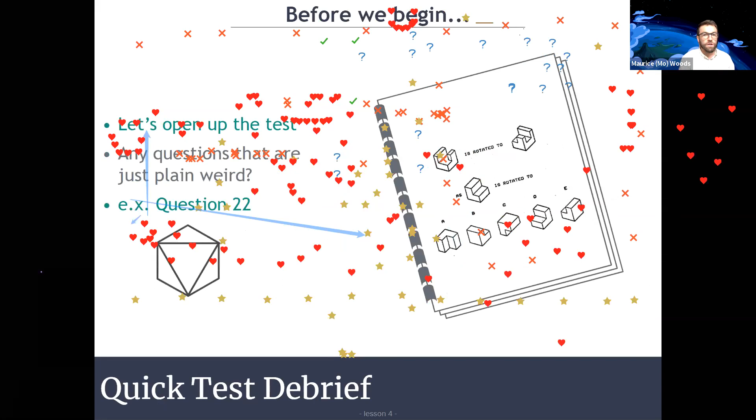So a few things are that, well, before we start, I want to talk about the test. For those of you who have taken it and retaken it recently, I guess let's talk about it. I'm not actually opening anything right now, but I want to talk about your feelings about the test. I get a lot of grief about this particular question, understandably so. It looks like an envelope sometimes, or a 12-sided dice or something like that. If you have taken it recently, or if you just want to ask some questions about the test, what's frustrating you, what just doesn't make sense, I'd be curious to hear what you say.

So does anybody have any questions, any statements about the test, anything that they don't feel like the workshop is quite addressing, and they want more directed help? I guess obviously that's kind of a loaded question, asking you to admit to struggling, but I think that this is a safe place.

I feel like the last 5 or so questions are more difficult. I would agree, Maxine, absolutely. In fact, I think that's maybe by design. I know that Ella says yes too, we got a second vote for that one. It's definitely harder. It's kind of broken up into thirds: the first 10 questions are single axis rotations, the next 10 questions, 11 to 20, are 2-axis rotations, and then the last 10 questions are still 2-axis rotations, but with much more complicated shapes. So it certainly ramps up.

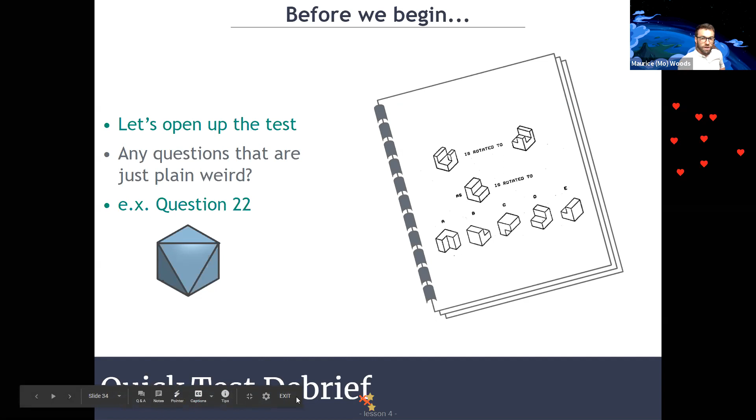I'll actually just go over here. Epic Pen, I think. Yeah, Epic Pen is a tool that you can use to annotate your screen. So you can always use this, because since it's a digital test, you can draw over your screen and whatnot. That's maybe helpful, whatever you need to do.

To either practice or to make the test easier, I think that it's worth exploring. One other thing that I want to make clear, I haven't really discussed this too much, but it's the fact that I've generated, and most of you have taken my CAD workshop through GEEN 1400, Onshape, this CAD software, is a program that I have used to create models of all of the shapes that are on the test.

Now, I've randomized the models. I've named them different things, but these are all of the problems on the test, every single shape. There's 30 of these shapes. And you can practice with these, you can manipulate these and kind of see how they look.

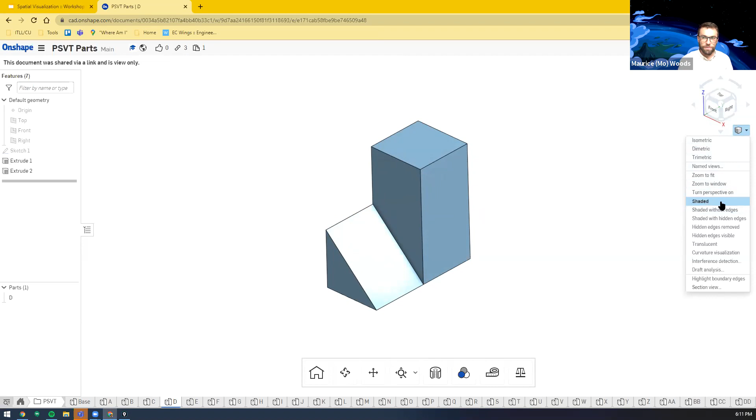One thing that I'll share with you, which is not something that we really go over in the Onshape workshop, is this view options. You can do shaded without edges. Oops, actually, that's not the one. You can do that, but let's see, what is it? I think it's hidden edges removed. Here we go.

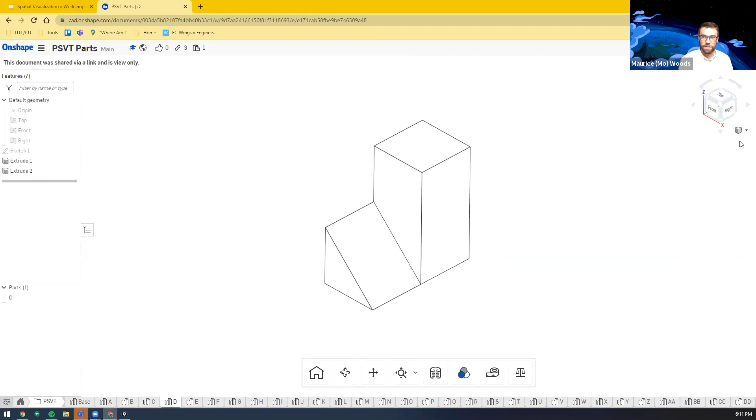So this is very much like the test. This is a representation, a manipulable representation of the things that you see on the test. And by clicking on the isometric view, you can kind of manipulate and play with some of these that maybe give you a hard time.

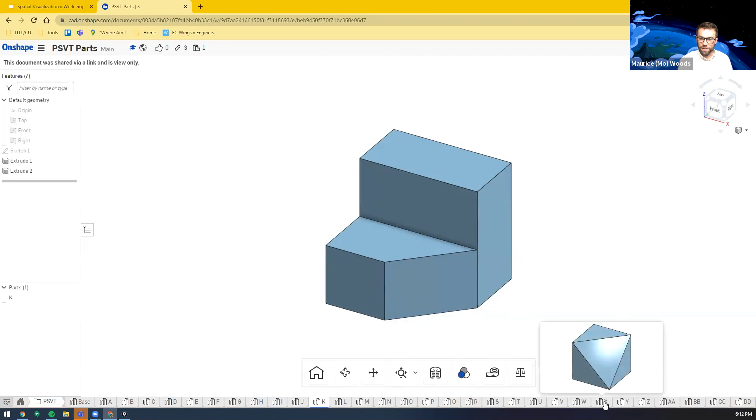Maybe you can go through here and try and find that darn envelope looking thing, the one that everybody complains about. But I think that that's also a resource, I'm trying to give you as much as I can think of. But if you ever have any suggestions or questions, hey, can I see this? Can I see the answers to this? Hey, you know what? Honestly, probably. I'm happy to work with you.

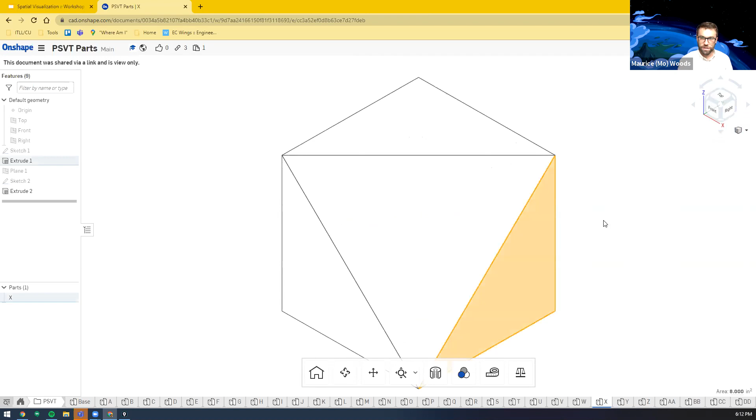So anyway, just kind of rambling while we kind of prepare and come off of the test and debrief off of that. But I also understand that we just came off of kind of a scary week, hell week with midterms and exams, not to mention the fact that we are all now remote.

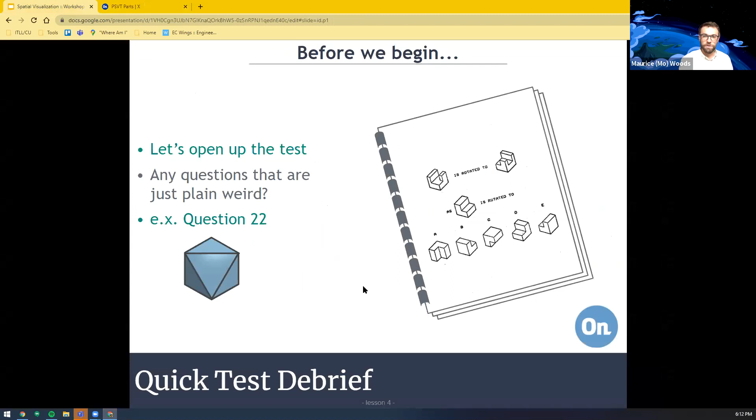So I guess that is all to say before we jump into this, I hope you all are great, or at least I hope y'all are hanging in there. If you're not, please let me know, if for no other reason than to talk to somebody about it, because I'm right there with you. All right.

Inclined planes and curved surfaces.

Today, what we're going to be introducing is something much more like the test. Very few shapes in the test - in fact, maybe 2 or 3 shapes in the test are only made out of cubes or square faces. Whereas most of the other parts include some sort of inclined, fundamental geometry, be it with an inclined plane or a curved surface.

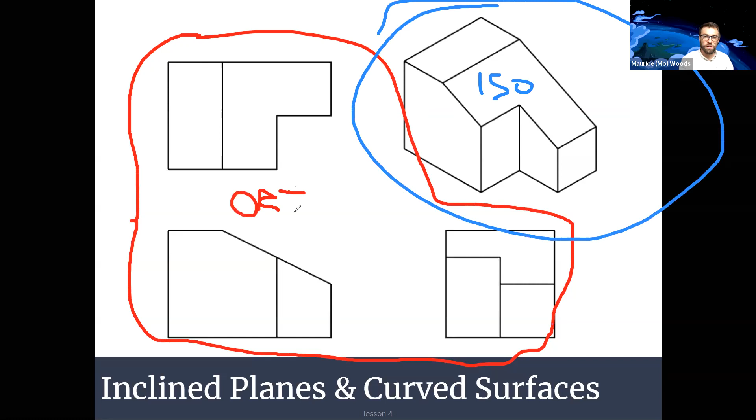Thank you, David. So this is iso, isometric, and these are ortho. And admittedly, let's see, are we missing any dotted lines? No, it doesn't look like it. This is the type of shape that you would expect to see dotted lines if there was some sort of feature in there that was hidden, but these do not have those. ISO, we don't use dotted lines, right?

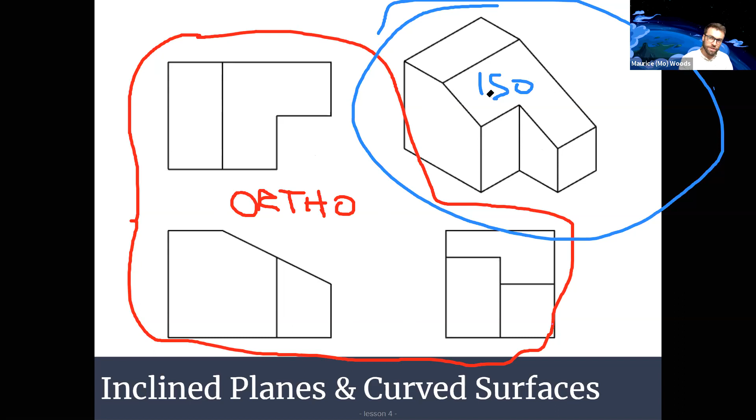So great, we're going to be combining these 2 viewing types, just like we were with the isometric lesson, but we're going to start introducing more complicated features. So let's talk about that.

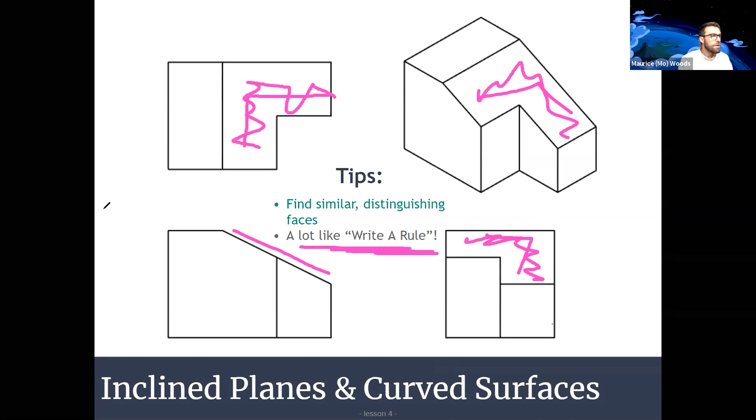First things first, find similar, distinguishing faces - this is kind of the key to most of what we've been doing anyway. So this L shape stands out pretty strongly. I would say that noticing that this is all the same shape is not only helpful, but it's kind of important. Then also, using the write a rule trick - that's kind of where this comes from - is identifying these faces that are moving and maybe represented in different angles.

Look at that - it's almost like I wrote this 3 years ago with the exact same intention that I have right now.

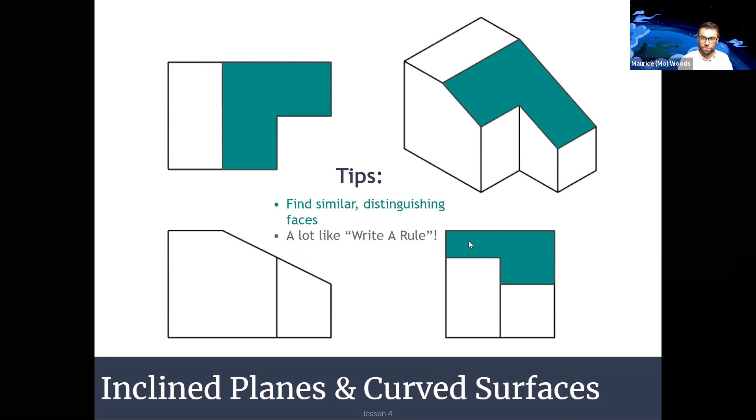Okay, so let's actually talk about that process. We just saw that shape and it disappeared, and if you can draw it, that's great. But just like any other one of these workshops, let's kind of work through it together, and then we'll practice a couple things.

So we've got our shape right here. First things first, for everything that we do, what's the first thing? It's not connect the dots - it's what? Somebody draw it up there if they know, or you can shout it out and I'll draw it. Establish the axes - wonderful, thank you.

Axes, beautiful teal colored axes, wonderful, thank you. I'm going to draw some slightly bigger and color-coded axes, if you don't mind, but that's fantastic. So we've got our coordinate system, and now we need to start with our isometric drawing.

Now, what was my recommendation for starting with isometric drawings? Can anybody remember what the first thing is? And while we're thinking about it, I'm going to draw some of these coordinate frame references right here. So here's this, here's this. What was the strategy that we took with isometric drawings?

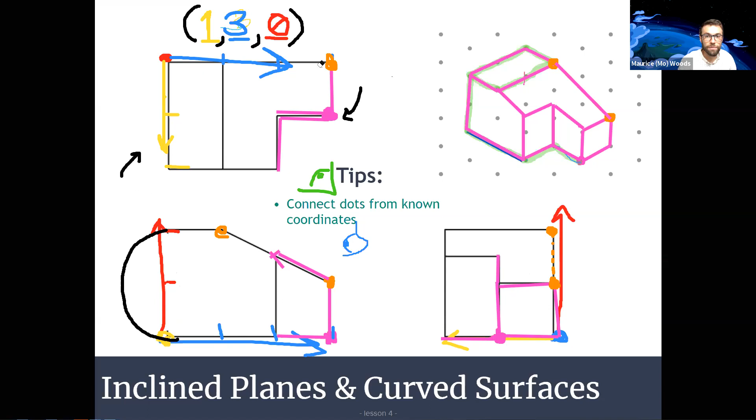What's this going to look like for our shape up here, our view up here? Let me clean stuff up just a little bit. Very good, so we kind of have this caboose getting drawn on the back here. It's going to be a rectangle because the side profile of a cylinder is a circle on one end, but a rectangle from the side. So while it's a half circle here, it looks like a rectangle on this side, okay? That's great, somebody's already been trying it out with this bright green pen, that's great.

I would say, and this is what we were doing with this grid thing, let's find places where this thing intersects with vertex points, points on our grid, and then we can actually go and draw those points and connect the dots.

Thank you for drawing that, and thank you for erasing it too, because let's talk about it first, and then we'll pretty much redraw exactly what you did. I want to step through it.

We see that our blue axis needs to be extended into the negative direction. If this is the case, then this point right here, this orange point, is at coordinate axis, let's see, 0 in the yellow, the in and out version of this.

Actually, well, yeah, I guess it can be 0. It can be any of these points. Yellow isn't really important. Let's see, red is going to be 1 and blue is going to be -1. Where does that exist in here?

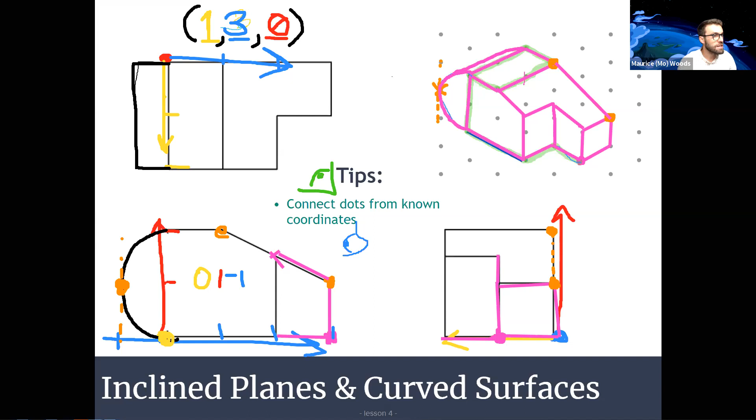Okay. Very good, thank you for participating with that. I think that Zoom's annotation tool is just swell.

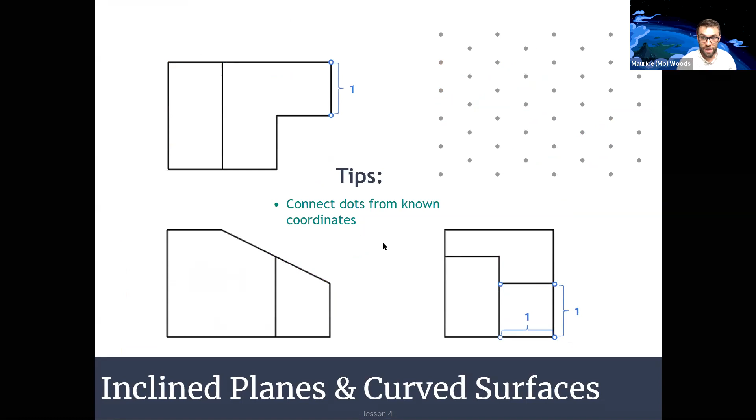So let's real quick see this thing, my animation attempt to kind of show our thought process: drawing this first square face and then drawing the points out from them one space at a time. We can keep building these edges, then lay this grid down, or rather connect the dots, so the purple line would go across here, and then we make this intermediate grid with our dotted lines. Then we can connect those dots, and everything is good.

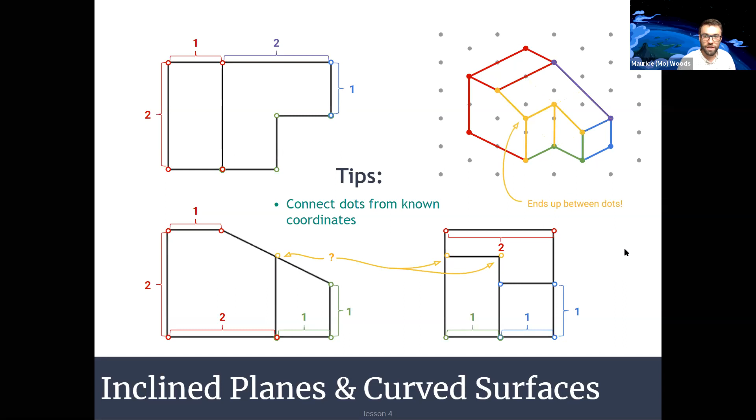So moving on, let's draw this one. Let's start playing around with this. And then I think the point is made. If we have any questions, that's fine, I'm more than happy to answer them as usual. But let's see... oops, nope, this is this one. I'm just going to start drawing our coordinate grid for us.

Right now, does anybody have any questions, comments, or concerns about the nature of the test, about this subject in particular, or anything else?

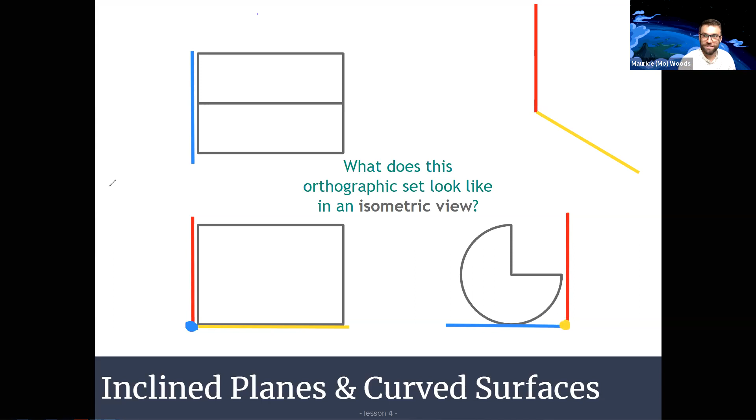Well, that's fine. Anybody, how did tests go? Do we have any smiles? Smiles, it's done, we're done, done with the test. Okay, maybe just a little bit of shell shock. No, hey, we got a checkbox. I like that, that's that, okay my day is made. Thank you, checkbox, whoever you are, I appreciate you. Hey, and we got some thumbs ups. Good, I'm very glad to hear it.

If you struggled last week, then you know there's more weeks, that's why there's 15 weeks in a semester. And if the question's about physics, boy howdy, do you know somebody who taught physics? I'm just talking while I'm drawing. I'm a physicist, so you can always come ask me.

Anyway, let's start drawing this. So here's my coordinate grid that I've drawn out, all set and ready. What I want to do is draw the eyeball.

Let's see, I'm going to choose a view from this direction, so it's kind of up here, and kind of, this is the back of our eyeball, kind of up here. So again, let's choose a point. This is maybe more interesting, because there's not a whole lot of choices like when we choose something like this. If I chose this point, where is that point on this one?

Before, we had some options where we'd say it's on the 0 level, if there was a vertical edge or something like that. But that's not the case in this one. This one is directly above the yellow axis. So let's see, we've got some points showing up right here.

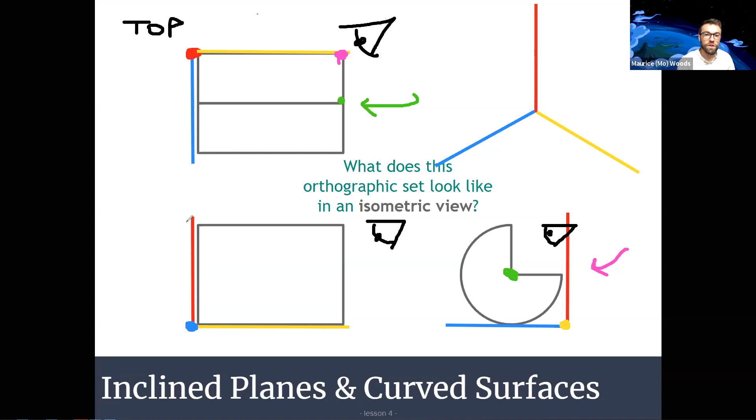I don't know, okay, so where are they? Okay good, so we've got a green spot here, so that's where this green spot goes. Very, very good, it's kind of smack dab in here. It's actually any point along this edge.

Actually, it's not any point along this edge. What am I talking about? Come on, where's my Control Z? Uh-oh, that's Control X, what are you doing?

I would say that this thing needs to move over here, oh goodness, over here, because this point is kind of lined up with this point, and then similarly this point like this. So actually this is something we didn't really go over too much in the orthographic views, but when we draw our shapes in this configuration where it's the top, the right, and the front, we can actually see that these points are going to align between our views.

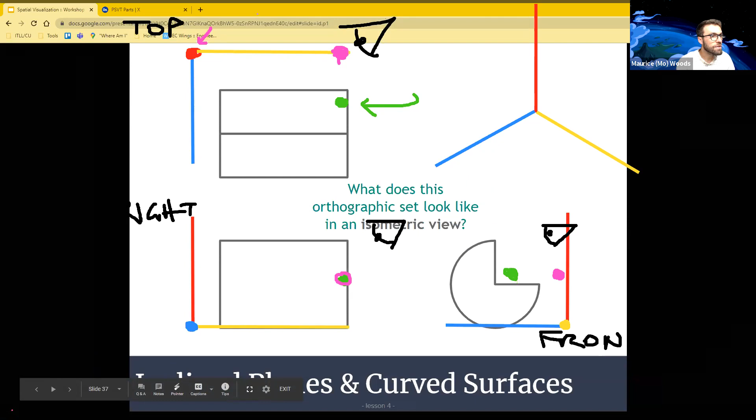Maybe I can do something more helpful than, oh my goodness, than what we're doing right now. Ooh, how do I do this? How do I get rid of those? Well, can I save? What does that do? Save this PNG. Well, we can redo it. Let's see, clear all drawings. So, oops, no, don't show it off.

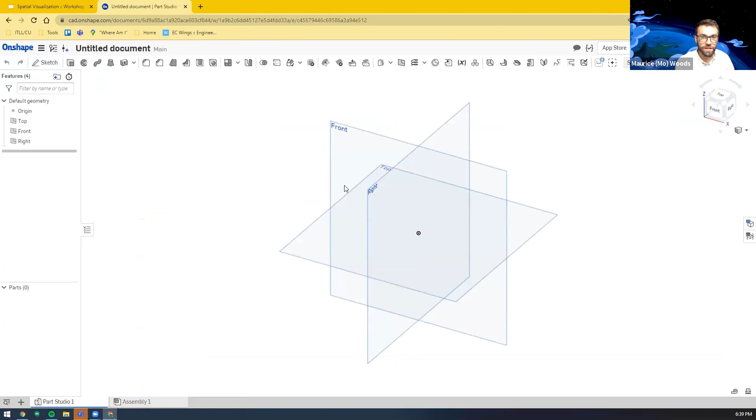Let me quickly create this in CAD so that we can all see it. We've got a little bit of time. Maybe a quick review of how to use CAD.

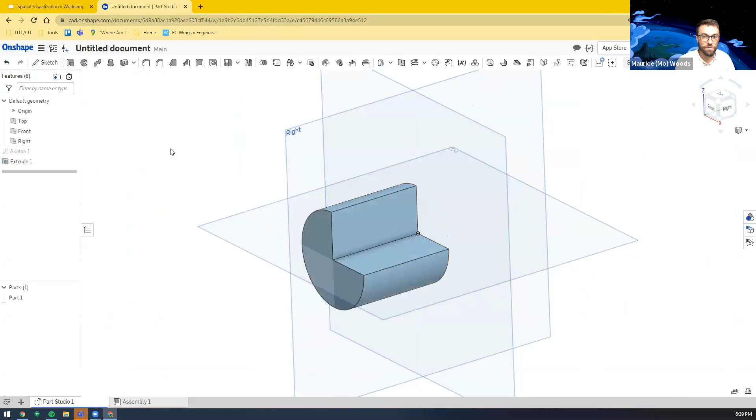So the reason why we're doing that is because when we project our edges, and this is maybe a little bit of a spoiler alert of the thing that we're looking at, the end goal of what we're aiming for. So we've got our part, and maybe this is one of the views.

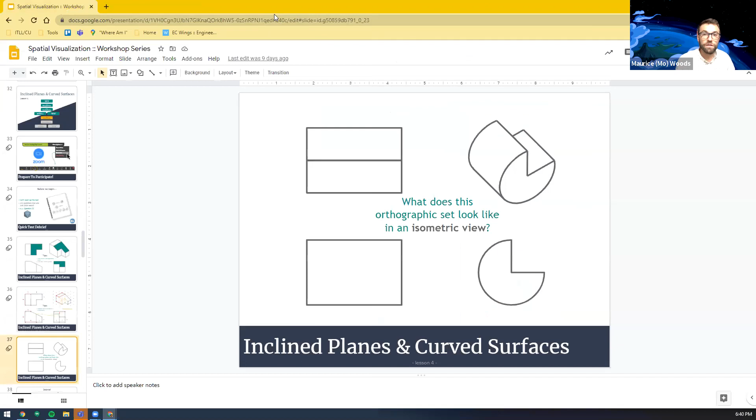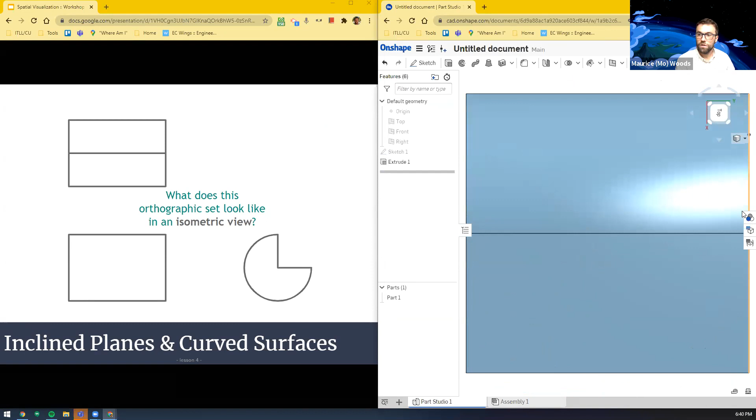Let's see, maybe I can do this like this, and like this, and like this. Don't worry, I'll get there. Here we go, very good. So the top view of this thing is looking like this. Here we go, okay, so we got our top view.

When I go rotate it down, our side view looks like this. This is not very helpful, it's kind of a confusing perspective. But when we look off to the side, I rotated the wrong way.

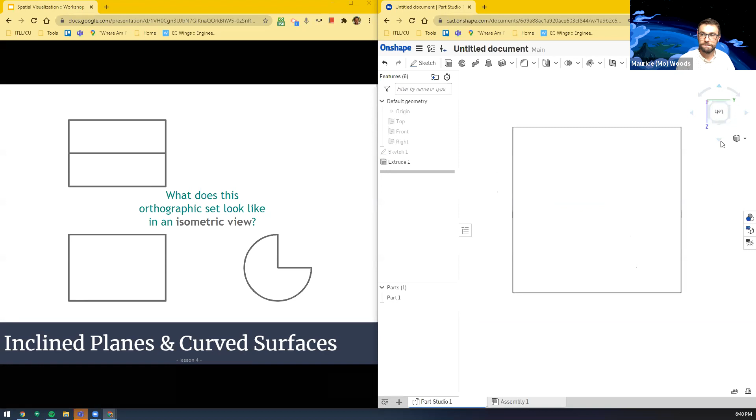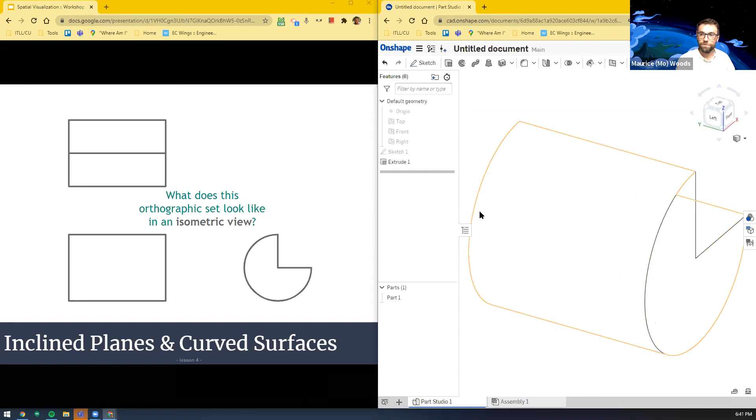Let's see. Front, left, and top view. I see. What did I do? Usually this one is called the side, I think, is maybe what I'm getting wacky on.

Okay, so effectively, I shouldn't have called it the right view. Let's fix that. So instead of the right view, let's call it the left view. But again, one of the sides - this is the top view, this is the front view.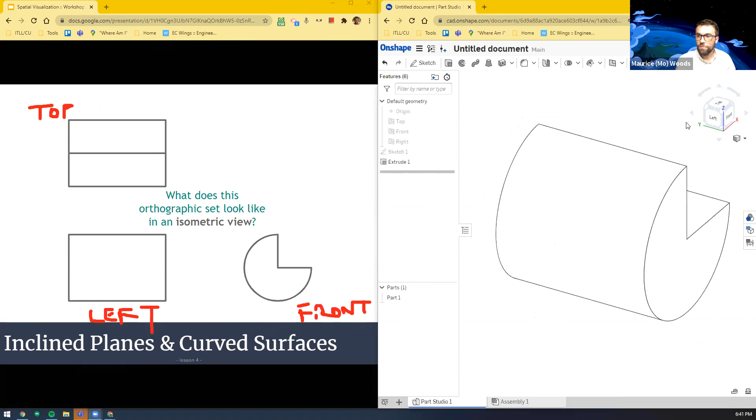So if we're moving from, say, the top - I'm going to try and do this as best I can - moving down to view the left-hand side. And actually, this is the question.

So your question was, if these two points - these were the green and pink points on our part, these two points that I've highlighted - if these two points look like this when we're looking from the top view, when I rotate it down to look at the left view, you see how they overlap now, when we look from directly over on the left-hand side of this thing.

The points line up, but let's see, not this the wrong way. But again, when I looked from the top view, they are kind of at an angle from one another.

So let's actually do something else here too - turn perspective on. I can actually see more of a perspective view with this. So again, top view - this is kind of closer things are zoomed in, further things are kind of away, more like how our eyes work.

And then when I rotate it down, those two points are going to overlap one another. When I rotate it this way, they again become unoverlapped. But that's the thing about these points along, say, the x-axis.

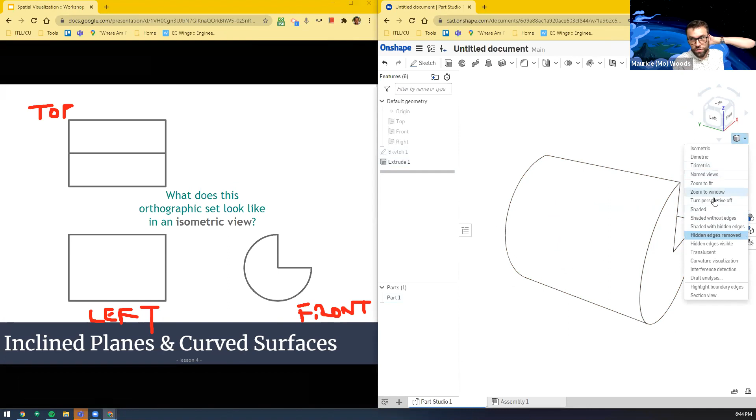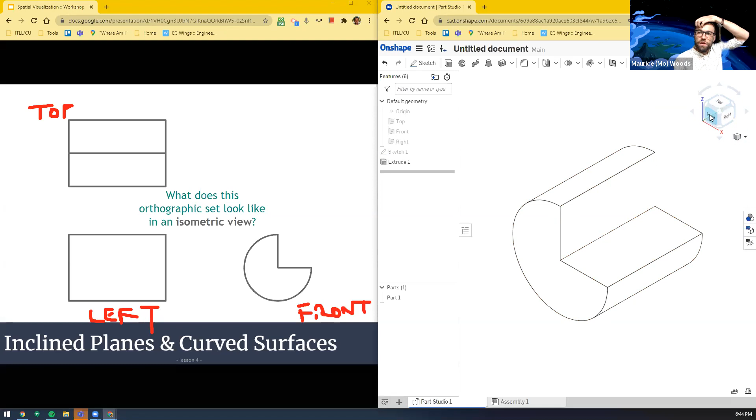Yes, and Brendan makes a good point - it's orthographic and isometric views. This is a perspective view using still or isometric. This is kind of the isometric view is kind of where it's positioned. But if I take off the perspective view, here we go - orthographic views are those points will line up if they're on the same axis.

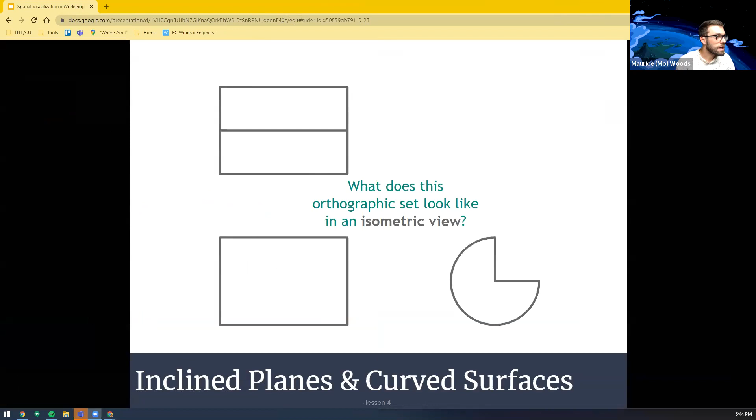Okay, so yeah, ultimately this is what we're going for, but let's draw it real quick. Clear all drawings. Let's see, we chose this point, and again, let's see, I need to collect my thoughts. Here we go, we're going.

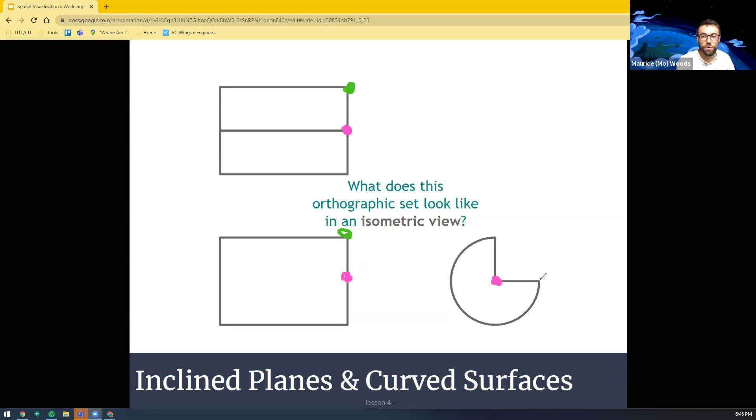Point right here, point right here, point right here. If the red axis is up, the yellow axis is this way - I don't know if that was how it was before, but that's fine - and then the blue axis is this way. Then what does it look like?

And so let's start by somebody drawing. Let's start drawing the pink and the green points on this kind of grid without grid points. And I'm going to continue to draw these axes just to make sure that we are all on the same page.

It's a lot of work drawing these dang axes. Okay, so pink point is - what are the coordinates - I'm just going to start drawing them out. Pink point is on, let's see, like this.

Green point is this one. Somebody go ahead and just help me out here - what are the coordinates of these pink and green points? We got red first.

Red is the first digit. Yellow is the second digit. Blue's the third digit. Okay, and it looks like somebody's starting to draw these right here.